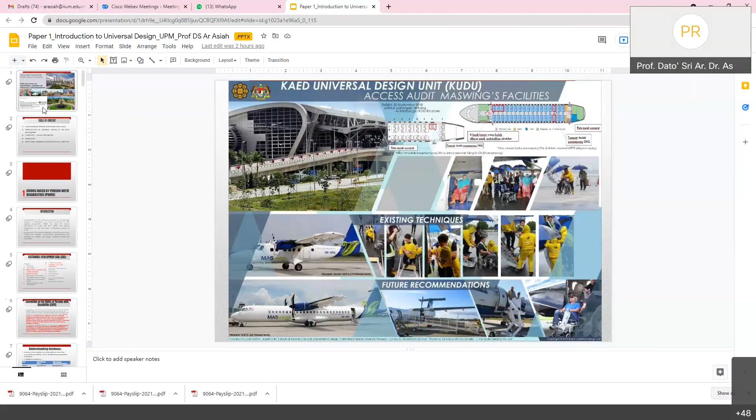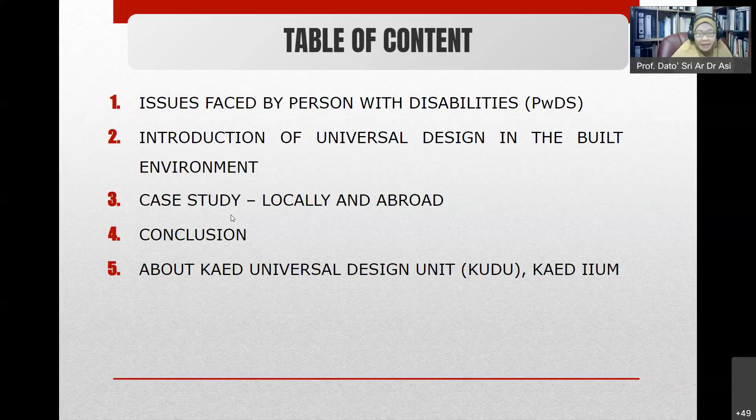This is the title of my presentation, covering five topics: issues faced by persons with disabilities, introduction to universal design, case studies locally and abroad, the conclusion of my presentation, and finally a little introduction to my unit, the Universal Design unit in my university.

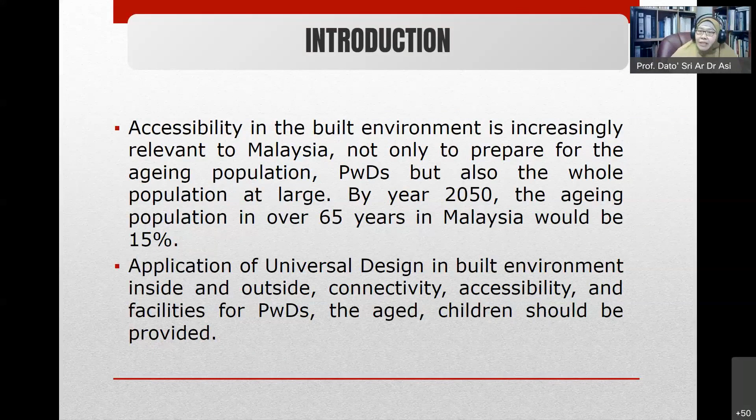By the year 2050, 15% of the Malaysian population will be above 65 years old. Therefore, this concept of universal design should be practiced now and improved further, inside and outside buildings, in terms of connectivity and accessibility, to cater for the needs of persons with disabilities, the aged, children, and others.

Therefore, we recognize the importance of accessibility to the physical, social, economic, and cultural environment, to health and education, and to information and communication, in enabling persons with disabilities to fully enjoy all human rights and fundamental freedoms. When we talk about economic, we must give them the opportunity to get jobs so they don't become poor. We must give them the opportunity to go to school - preschool, primary, secondary, even up to university level. Health, good health, and also the opportunity to get information, so that this group of people can have a better life.

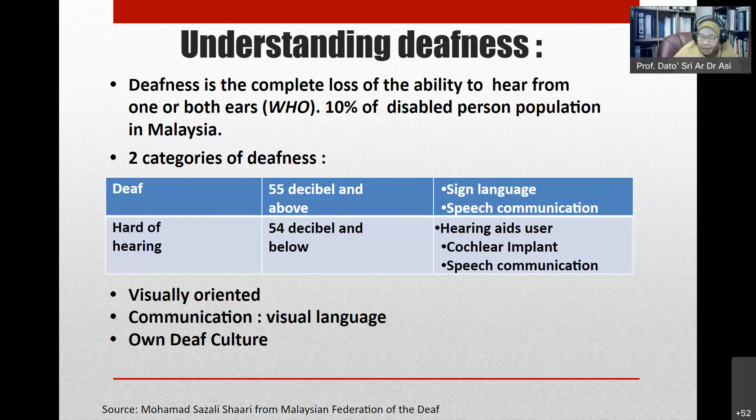It is important for us to understand, especially at building entrances and information counters, what are the expectations for this group of PWDs when entering a building. The best solution is having a glass door compared to a solid door, because they can use sign language to communicate with the reception if you're using a glass door. If it's a solid door, when a deaf person knocks and the reception answers 'please come in', he or she cannot hear. A two-way video intercom can also be used for this communication.

Induction loops are normally popular at transportation hubs. Information counters are normally busy and noisy. The solution at the reception or information counter, if that person is deaf, is to use pen and paper so this person can write down what he or she wants. For hard of hearing, you must have induction loops so he or she can have better hearing.

Another consideration is the lift. What happens if a deaf person is stuck in the lift? He or she can use the button to talk, or has to use a handphone, but sometimes there's no line in the lift. So for the deaf, in an emergency, there should be a special emergency button, a receiver for mobile phone, and for hard of hearing, a special emergency button, receiver for mobile phone, and induction loop system.

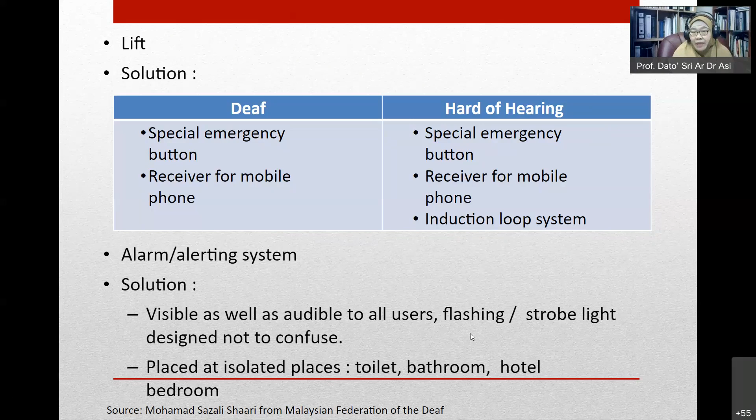Disaster warning or alerting system. There is a case where the majority of deaf persons working in a factory are all deaf. If there is no flashing light, and if there is any emergency like a fire, they cannot hear the bell ring. So what happens to this group of people? They will die if there is no support system to give them an indicator that an emergency is happening.

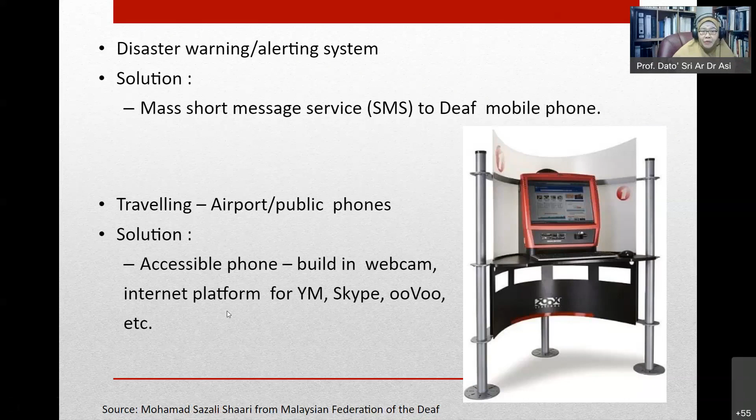So short messages, for example SMS to a deaf person's mobile phone, is another solution. Now it's quite common, even in the airport - if there is any flight delay, the deaf person will know his flight is delayed through his smartphone. Traveling, airport public phone solutions: accessible phone, built-in webcam, internet platforms like YM, Skype, and others.

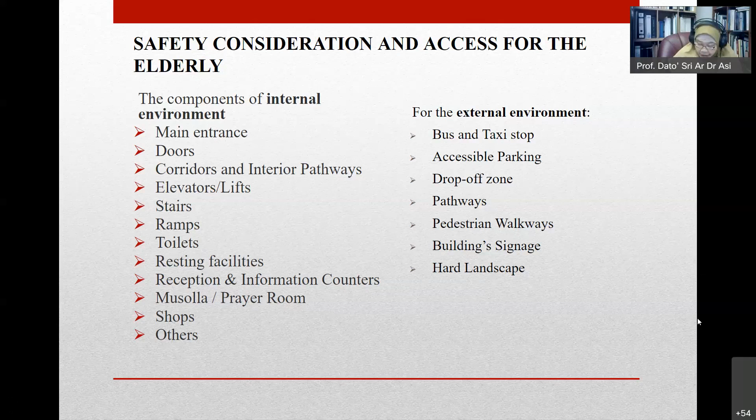These are the comments given by my friend, Godfrey. He was at the Malaysian Association for the Blind. He got his degree from UM. For your information, I told you earlier I was in this topic for the past 25 years. I think I look young, but I'm not young, I think.

He said engineers and contractors may be ignorant of the PWD standard in the code of practice, lack knowledge of principles of accessibility towards facilities for PWDs, cost cutting by developers and implementers, and lack of coordination between authorities, consultants, and developers. This is especially true at external spaces where you have your pedestrian walkway with so many things there - lighting posts, trees, and letterboxes. So there is no clear path for the pedestrian, and everybody is fighting for the space.

Broken tiles, warning and guiding tiles, uncut branches protruding into the pathway. The vision impaired normally use a white stick to walk - this is his eyes. So when he is using the white stick to walk, his foot is okay, but his forehead will be hitting the branches of the trees. Therefore, it is not suitable to position trees in the middle of the pathway.

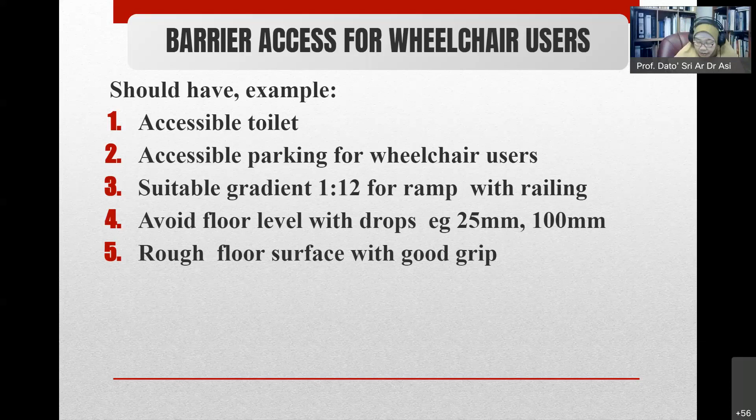Now we go straight to introduction to UD in the built environment. I am telling you about the Malaysian situation. If you are not from Malaysia, you can learn something about our country. We got independence in 1957. From 1957 until the 1980s, the majority of Malaysian architects and engineers were still studying, whether locally or abroad.

During that time, we don't have any standards for the disabled. This is very important because sometimes our friends, persons with disability, complain about why a building is not accessible - 'I cannot enter this building.' So I tell them what year those buildings were constructed.

If buildings are constructed in the 50s, 60s, 70s, 80s, they are not accessible, because we were so poor during that time. The country was busy developing in terms of education, agriculture, economy, infrastructure, and basic facilities. So we didn't concentrate on persons with disabilities yet, as we wanted to make sure the country was performing better. Thus buildings erected in this period are mostly not accessible for the disabled.

So this is the history of Malaysian Standards. Malaysian Standards were initiated in the 1980s and published in the 1990s. MS 1183, published in 1990, is the specification for fire precaution in the design and construction of buildings, revised in 2015. Then we have MS 1184, first published in 1991, Code of Practice on Access for Disabled Persons to Public Buildings. And MS 1331, 1993, Code of Practice for Access of Disabled Persons outside buildings.

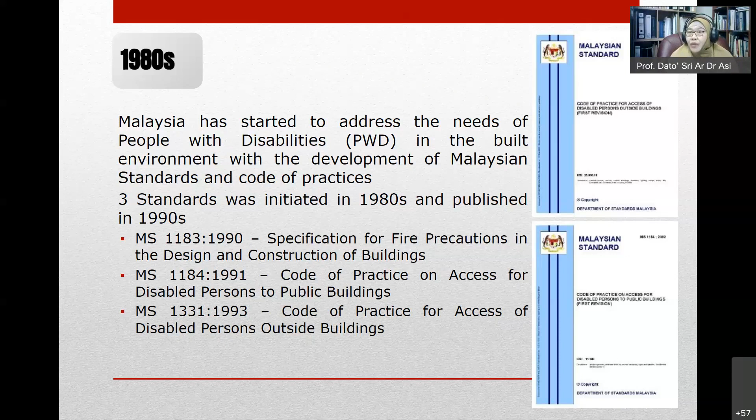When I checked the revision, I referred to documents from many parts of the world. We worked on that document for 2-3 years, and also referred to ISO 2011, which covers many countries. So if you look at the Malaysian Standard drawings, we have 2 sizes - one for ASEAN, the other for European. This is MS 1184, Universal Design and Accessibility in the Built Environment, Code of Practice.

For your information, Code of Practice MS 1184 is compulsory and mandatory, not voluntary. It is written in 34A of the UBBL. There are 2 documents specified there, MS 1183 and MS 1184. Both are mandatory and compulsory, meaning architects, designers, and engineers must follow this document and practice it, enforced both by local authorities and practicing professionals.

For your information, I checked 8 standards. Another document I checked is MS 2015, Part 1, 2006, for public toilets under minimum design criteria. There are more than 20 different designs. So when I was asked to do this, there was a history before - a Japanese tourist wrote a letter to our then Prime Minister.

Dr. Mahathir Mohamad, showing how beautiful Malaysia is, including the toilets. Because of that letter, they requested all the ministries to look into our toilets, and we prepared design criteria. I was asked to chair this document, and I referred to many references, one of them from New Zealand. I won't explain that topic today.

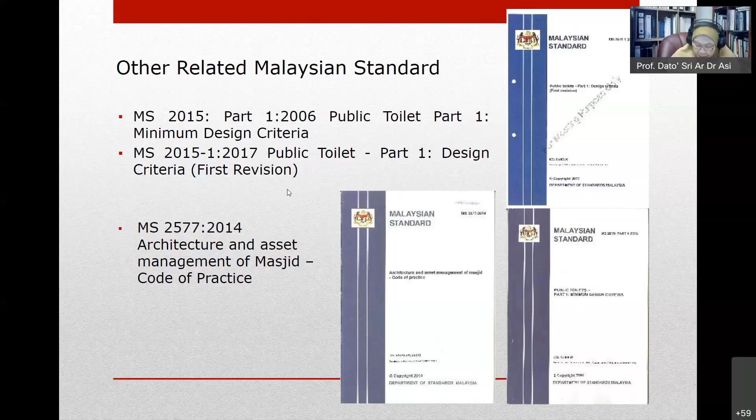We also have MS 2577, 2014, on architecture and asset management of masjids. I was asked by a practicing architect to do this document because they found not many documents or standards written on this, even globally. I checked architecture data and found that among all the data architects use abroad, only 1 or 2 pages were related to masjids. So I was asked to do this, and it was completed in 2014. I used many references for this as well.

So what is universal design? It means the design of products, environments, programs, and services to be usable by all people to the greatest extent possible, without the need for adaptation or specialized design - meaning from the womb to the tomb, people can use the space. Universal design enables a wider range of people to benefit from accessibility, safety, and usability without discriminating against anyone. The 7 principles of UD state that facilities should be designed to be usable to the greatest possible extent by all, so you have to use as much as you can from the space where you apply UD.

There are 7 principles. You can download this document from the internet.

Ron Mace is an architect, a well-known figure. Another definition regarding inclusive design is very important to consider: user-centered, user-centric, focusing on the users. When you want to design your building, you must know who your users are, both inside and outside, and also connectivity from one block to another, or the whole park.

I've assessed more than 700 buildings, including parks throughout the country, with more than 60 local authorities. I'm a consultant to 4 ministries, and I was with DBKL from 2000 until 2012, training them. Then with Putrajaya from 2011 until now, with MPPG from 2014, and many more. I train all over Malaysia, supported by Jabatan Standard and other ministries as well. So I'm quite busy, a bit less than Ustaz Kazim.

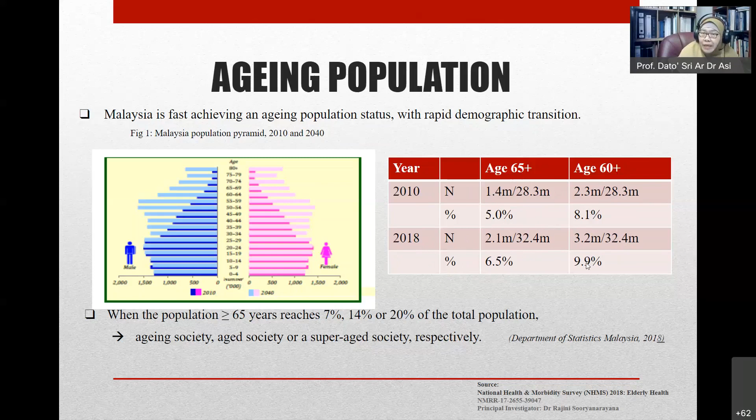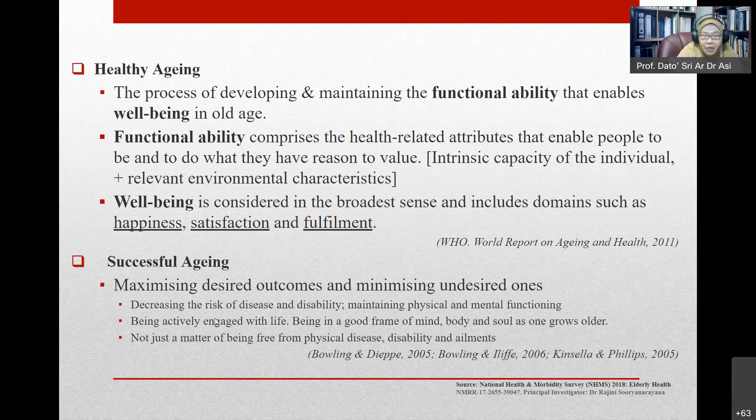Then we talk about resorts, we talk about transportation. Transportation covers air, jetty, water, rail and road. So all these 4 types of transportation must be accessible - accessible, connectivity, continuous - so that aged and disabled people can travel and use them, and also increase good economy for the country. Before PKP or MCO, Malaysia's number 2 income came from tourism. So I'll just go through this very quickly.

Here we talk about public transport and also social support. This is related to dementia. Dementia is a type of sickness that elderly will get, and there is no cure.

But if you refer to the Islamic perspective, if that person is a Muslim and reads the Quran every day, there is a possibility that you are not able to get dementia. That is from the Islamic perspective. I do not know about other races.

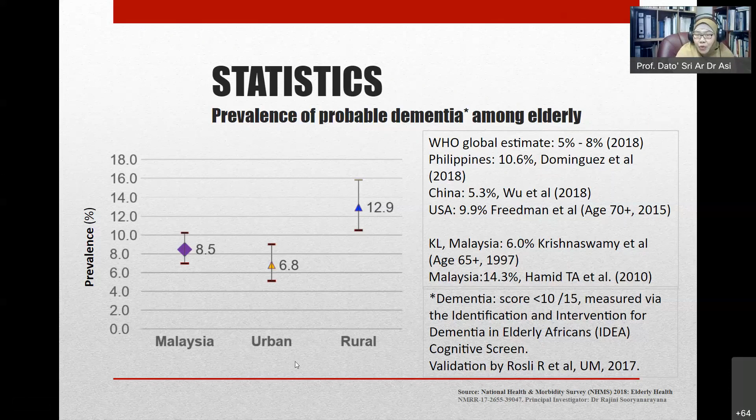So if you look at Malaysia's prevalence, it's 8.5%. Urban 6.8%, rural 12.9%. So the total percentage is higher for the rural area compared to urban in Malaysia.

This is more information regarding social support, quality of life, and living arrangement - living alone or living with family. You can see this percentage: very high is 3%, low to fair is 16%.

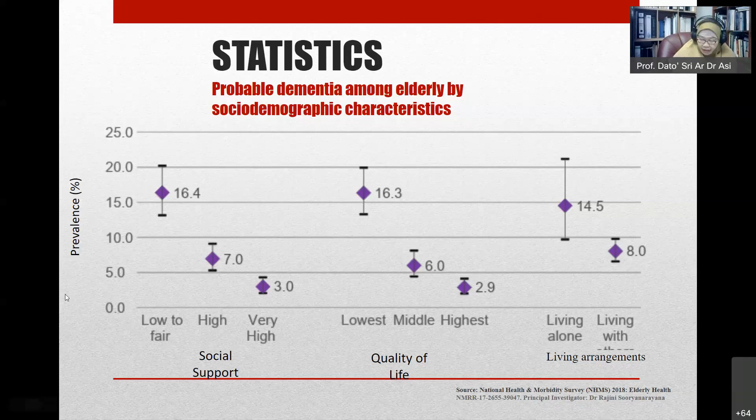It is quite frightening, Dr. Shurin. I'm now 63, I retired 3 years ago. I'm a contract professor in UIA. Let's say I will die at the age of 90, so I need another 27 years to work and sustain my life and health. Aging and health come together. If you provide good facilities for the aged, they can enjoy their life and good mobility, so they will have better well-being.

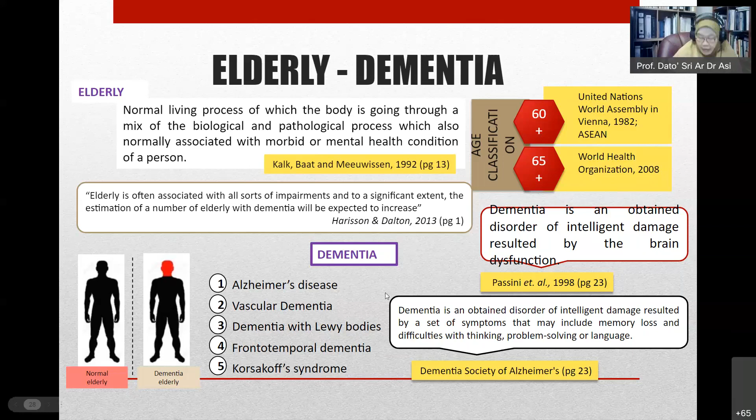Yeah, okay, this is dementia. I'm not going to go into detail.

For your information, as I mentioned, Malaysian standard MS1184 was written in the 1990s, same year as the Japanese standard. Our Malaysian standard and Japanese standard, same year, 1990s.

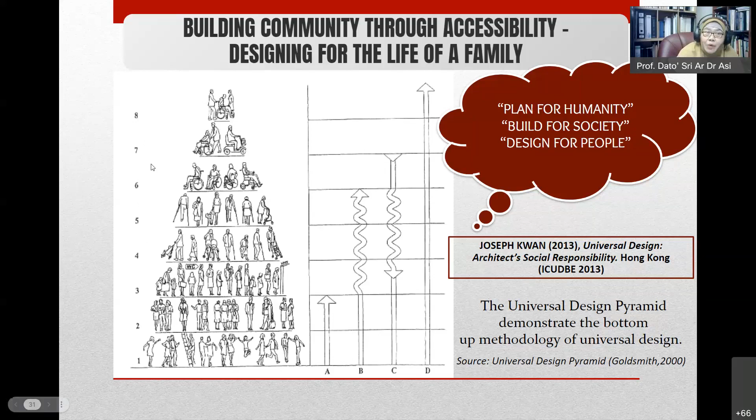One of my friends, by the name of Abdullah, told me, 'Prof, why don't we do it this way - if you focus on the disabled and the aging population this way, we cover everybody.' So I thought this was a good approach.

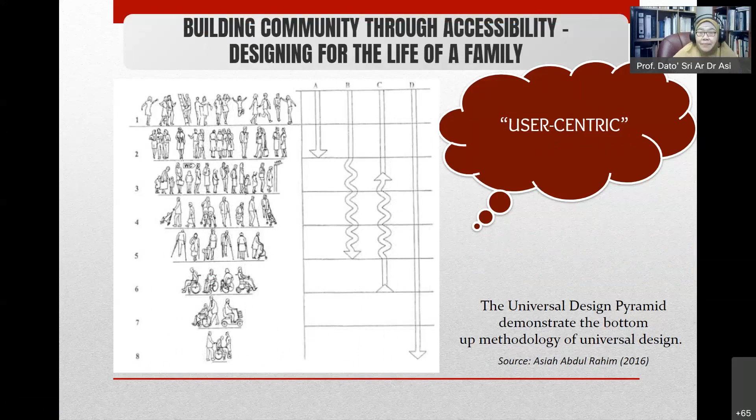So with this sort of disability - some you are born disabled, some you become disabled due to road accident or at work, and some due to sickness and aging. So you can have different causes.

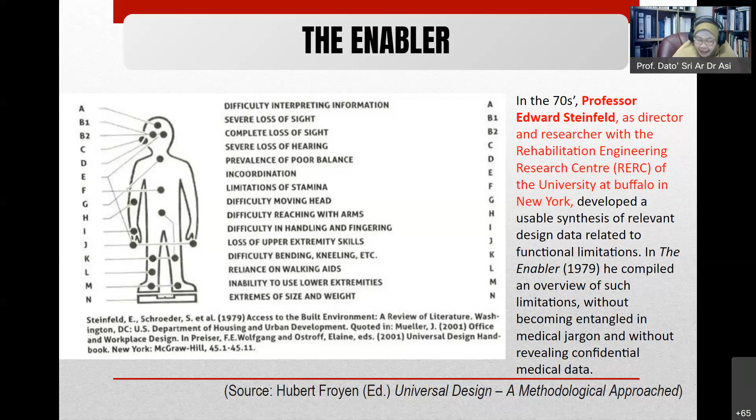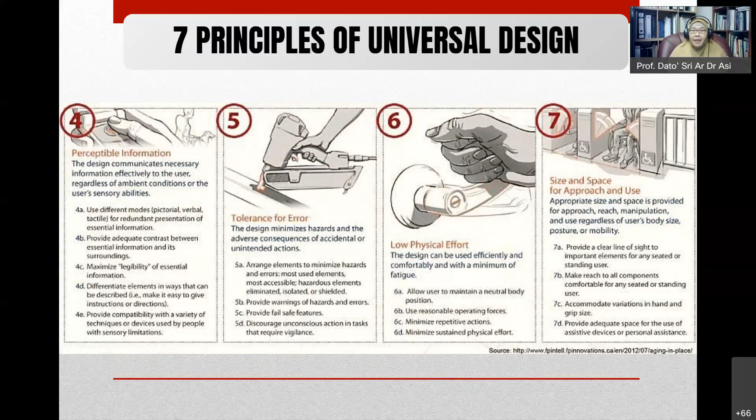So if your vertical circulation can allow all users to go up - for example, in one case, a particular wheelchair user only stopped at the 22nd floor, but his house was on the 23rd floor.

Why, Dr. Shereen, did he stop at the 22nd floor? Why? Can anybody answer me - why did he stop only at the 22nd floor, not the 23rd floor? Please answer me, don't be shy, we can do this very informally.

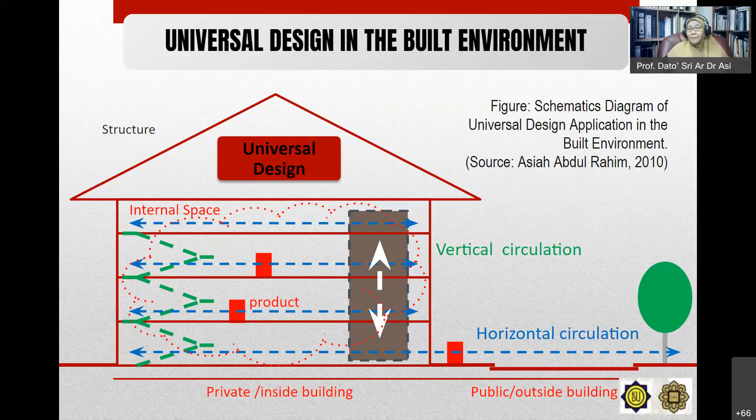Maybe the lift stops only at the 22nd floor because of the reachability - he can reach it. Oh, you cannot reach the highest button. So therefore, the architect must use a horizontal panel for the wheelchair user. Because the lift only has vertical buttons, he cannot reach number 23. Therefore he has to climb manually - he stopped at the 22nd floor, then from 22nd to 23rd he has to climb manually to go up to that level.

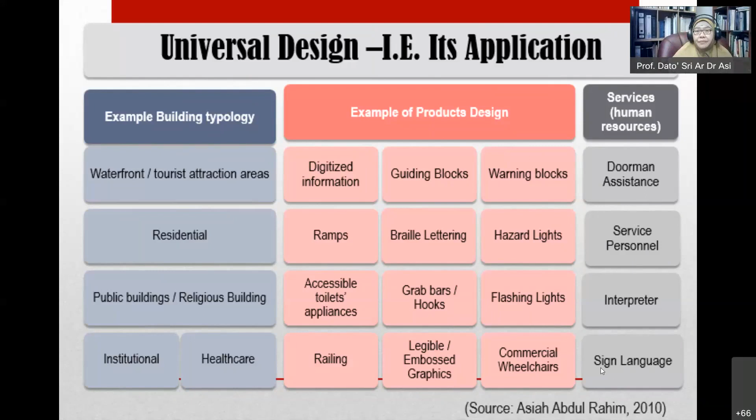I was involved with the Ministry of Transport to help prepare the SOP, the standard operating procedure, for their transportation. For your information, for flights, for the airport or the aeroplane, their SOP is good - we have no objection. If you go to KLIA 1 or KLIA 2, whether you take MAS or AirAsia, if you are an elderly person or a person with disability, they really take care of you. But you must inform them when you buy the ticket. So for me, I always travel using the OKU, the person with disability route. I travel all over the world using this route, not only to make my travel easier, but also I learned a lot from various parts of the world, the airports and others. I can share with you later on.

So this is, as an architect, where you want to position your universal design application in your building, where you receive your client brief, for example from a developer or something like that. For a new building, during the design process, you must put universal design consideration into your design.

I was a practicing architect for 25 years. I have my own firm and I have completed more than 340 million Malaysian ringgit worth of projects over the past 25 years with CCC and CF. In all the buildings I design, I include universal design. My firm started in 1995, covering high-rise buildings, factories, office buildings, clinics, and schools. I managed to include these facilities in my buildings because I follow the data from the Malaysian Standard, and the Malaysian Standard is compulsory, mandatory - it is equivalent to UBBL.

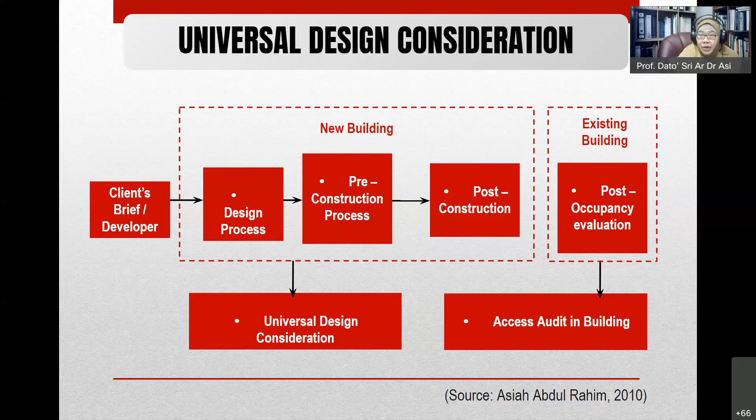This is detail from what I mentioned. I'm not going to explain it again, it is almost similar to what I mentioned earlier. There are two persons who do submission. The first one, the principal submitting person, which is AR, the architect, and IR, the engineer. Architect will handle buildings, IR engineer will handle factories and others.

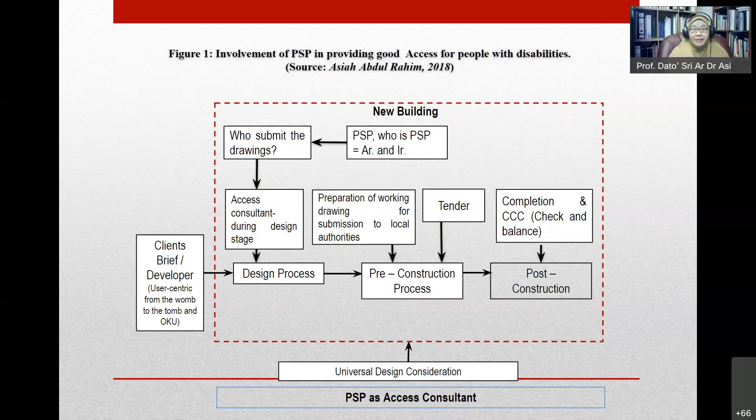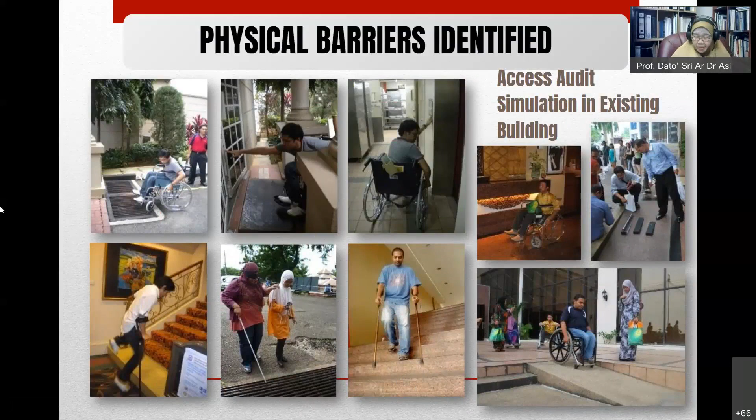I bought this house. I used to stay in Subang Jaya. I bought a house in Putrajaya because my husband was a wheelchair user. He was a civil engineer, but due to sickness, he was diabetic, so he had to cut below his knees. He retired at the age of 40. So I was the only breadwinner of the house with two young children and so on.

So I chose Putrajaya. I bought my house there because of accessibility. It took me 2 years around Kuala Lumpur to find the best option for me. When I am in UIA, my husband can stay in Putrajaya. He can go to the Clubhouse, wheeling from my home, only 10 minutes. He can go to Pasar Medan, the market, because the market is only 2 floors, but there is a ramp.

So the haircut is done on the first floor. And then you can go to eat at Medan Sejarah, a double story building, but there is a lift to go to the first floor.

This is very important, and he can also go to the lake because my house is very close. Sometimes I order my food at the Lake Club. I travel from UIA and say I want to see you and my children at 8 o'clock, I ask them to cook, and everything is ready on the table by the time we have dinner. He moves from home by car or wheeling, only 10 minutes, so when I arrive everything is ready. My life is easy, and my house is very friendly as well. I did modifications and so on.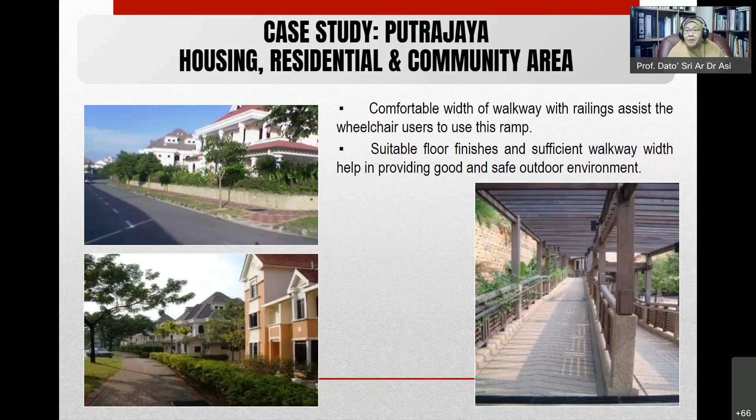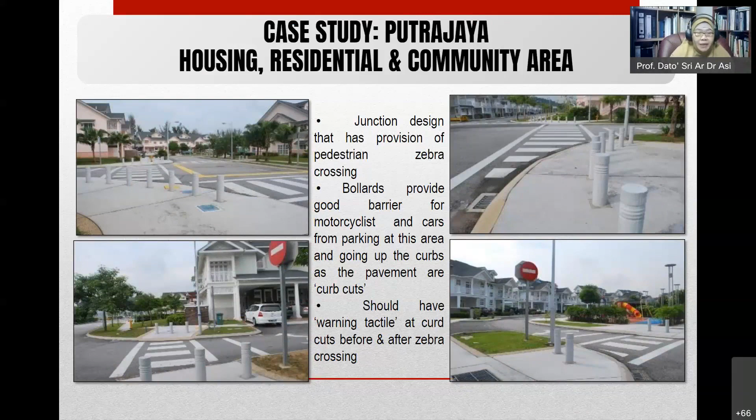This is another good example, Precinct 18. If you look at the curb, the height is only 75 mm, equivalent to 3 inches. Most curbs in Sweden or Scandinavian countries are about this height. Then your ramp is more pleasant compared to 150mm or higher, which is much steeper and you have to work hard to wheel. So this is one example which is very pleasant.

In Malaysia, there is a bus stop to cater for wheelchair users. This is a very nice approach to the house - the gradient is very comfortable, with a good walkway, clear pathway, no trees, no telephone poles, no letterbox, no lamppost, very clear like this. Although the size is only 1.5 meters, at least a wheelchair can go there. This is the quality that we expect.

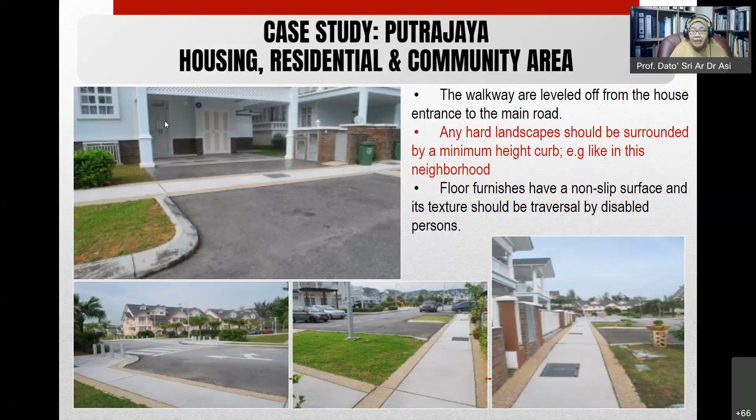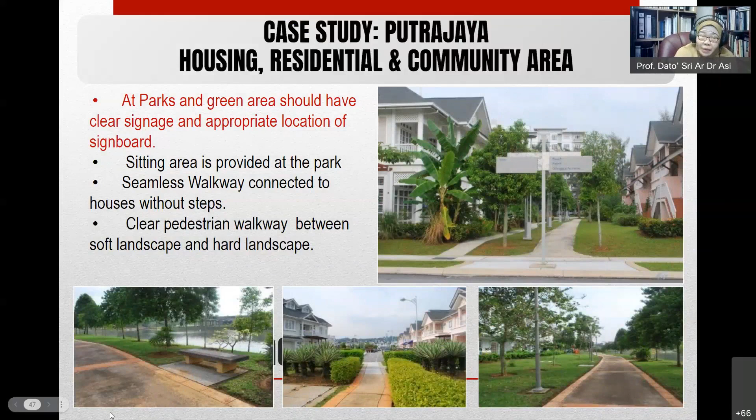More examples, look here below - this is near my house. There's a sitting area here with concrete before the walkway, so there's no grass here. If somebody wants to sit there and socialize, they can push their wheelchair near the seat. More examples - so I became a wheelchair user after my knee operation.

I was given the role of leader for a research project which required me to travel to many parts of the world. I traveled to Dubai, then Spain - Granada, Alhambra - and many other places. I went to London, then Scandinavian countries and so on, with many purposes and many types of building typology. So I used all kinds of routes.

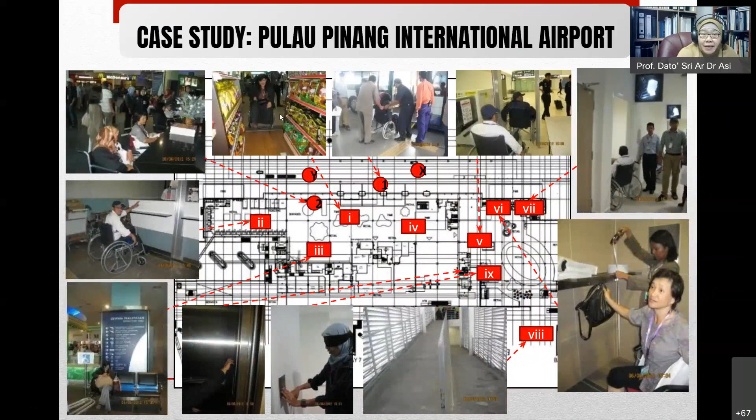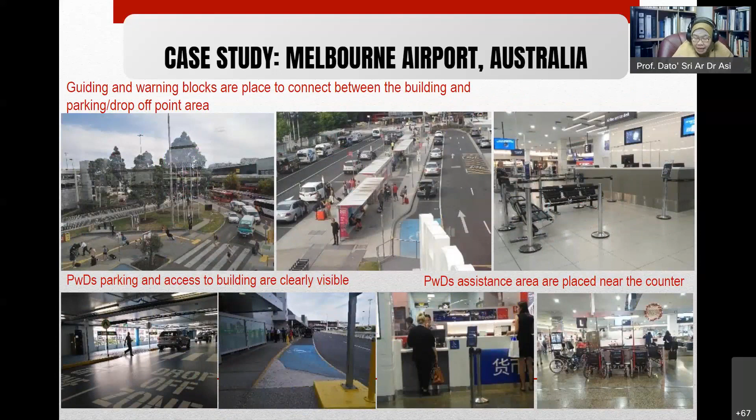And then there's the mapping of the city - I think this is another area we can develop further. I was in Melbourne - look how accessible it is, with continuity, connectivity, a seamless journey. You can see same level access, easy movement, and good signage. More examples in Melbourne - this is good, with big signage for, I forgot the term, those who are not able to read or differentiate between letters like P and B, B and D, P and Q.

So you have to use a big symbol, so you can see the symbol from far away. And also braille pattern there. This is very important.

But in Japan, one thing is good - their people, especially the vision impaired, are able to buy tickets at the counter because there is braille. I think in Malaysia it's quite tough, though they have been trained. I think Japan is quite advanced in the world at ticketing. Now these are some more examples of signages.

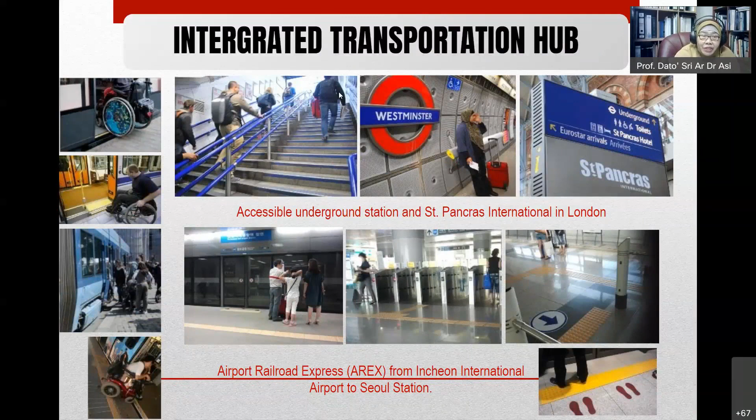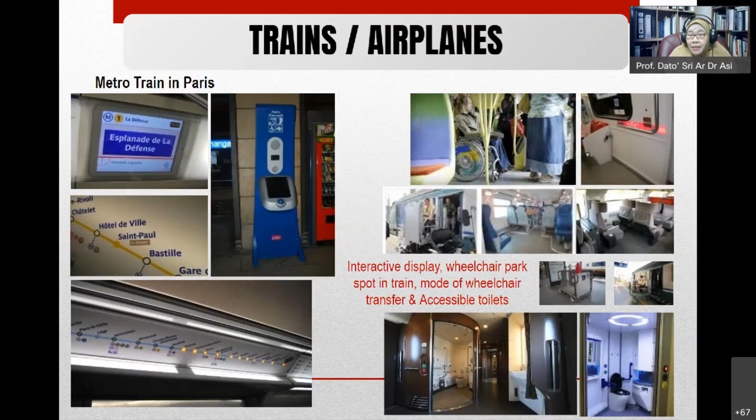In London, you have railing for children as well. And this one, for a train and aeroplane. Some facilities for transportation - this is very important for transportation, vans and so on.

Look at the details here. In Malaysia, we have these as well, and some free buses. MPPJ and Kuala Lumpur also provide free buses, but we must consider connectivity from one place to another.

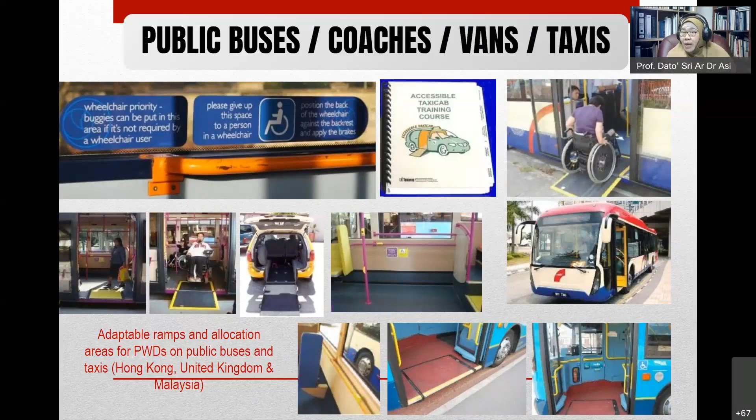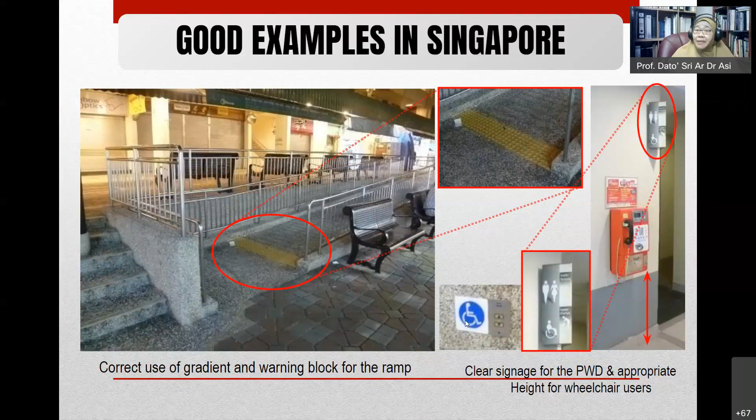This is another example - you have steps, and at the same time staircases and ramps with warning blocks. You can see the railing on both sides. You have seating for the elderly. You have small signages there, although the size is only 100 by 100, 4 inches by 4 inches. This is from my traveling to Europe and the United Kingdom.

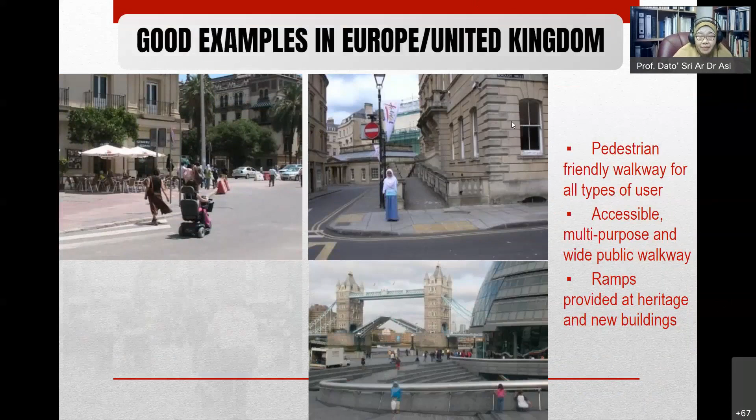This is a heritage building with a ramp. So you have steps and you have a ramp. But this is a little bit dangerous, especially for a pram or wheelchair with smaller wheels - you have to be very careful here.

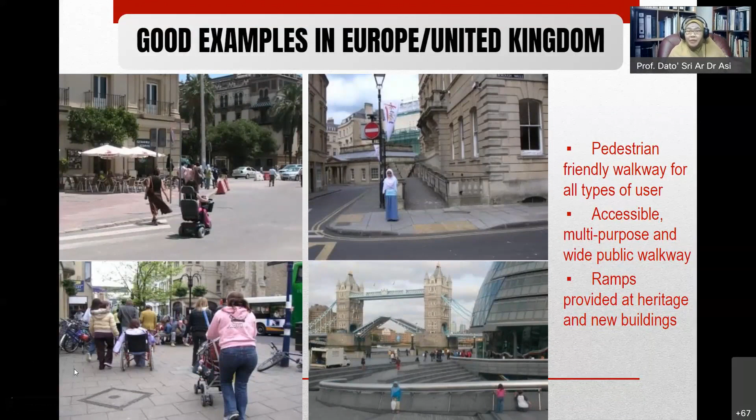The bottom left one is in Oxford - you can see all sorts of people using the space. If the spaces are accessible, everybody can use them, do shopping, and it's good income for the business.

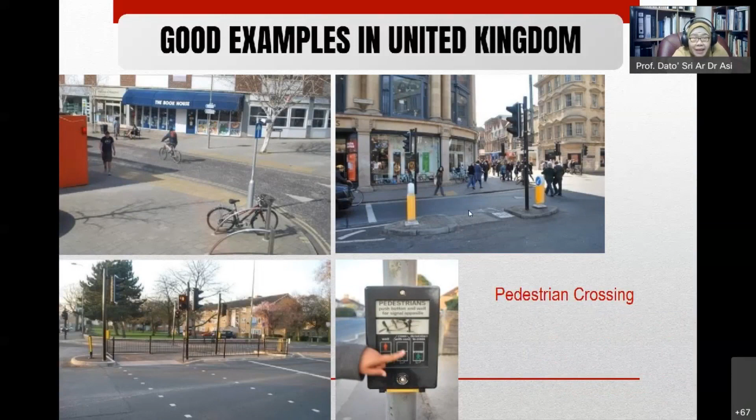Look at this one - to cross over, you just cut through. So simple, it's not very difficult. And I was wondering why people didn't do it.

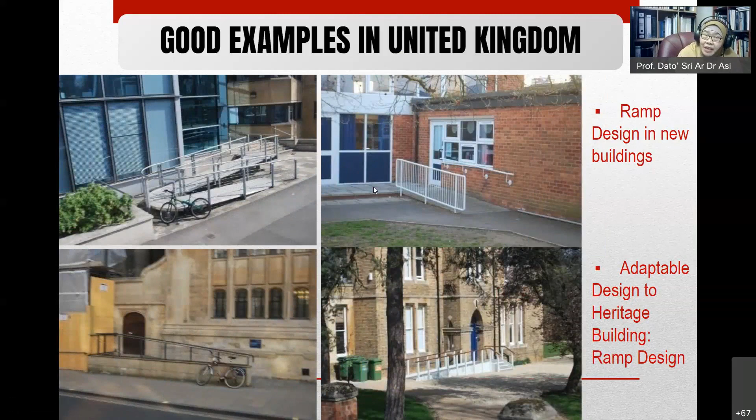This is an example of a ramp, to cater for a 1 to 12 gradient, so they have to go longer like this to cater for 5 steps. This one step is 150, that's 150 times 12, times 12. Then you have this distance. This is at a Heritage Building.

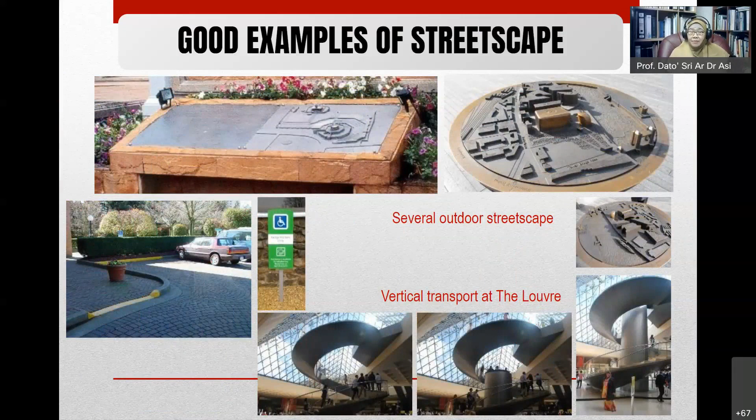More symbols for people, especially those with learning disabilities. In Paris, this one is very important.

Platform lift - you are not able to do the ramp because the side is small, so you use this platform lift. You just press the button, and this thing goes up. If you are not using it, it becomes like this.

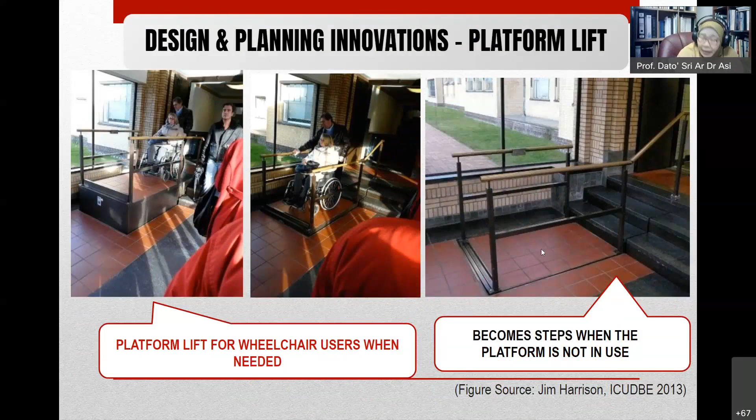This is from my friend Jim Harrison - we were together in many places. His mother has dementia, so at night she likes to go here and there. So what he did was buy a product there that can talk.

Go back to bed, mother. When she crosses, this product will talk.

Go back. This is his sketches. Yeah, so I finished some examples.

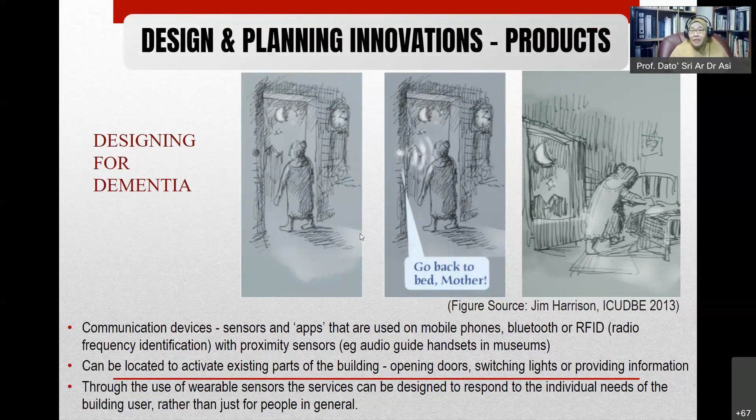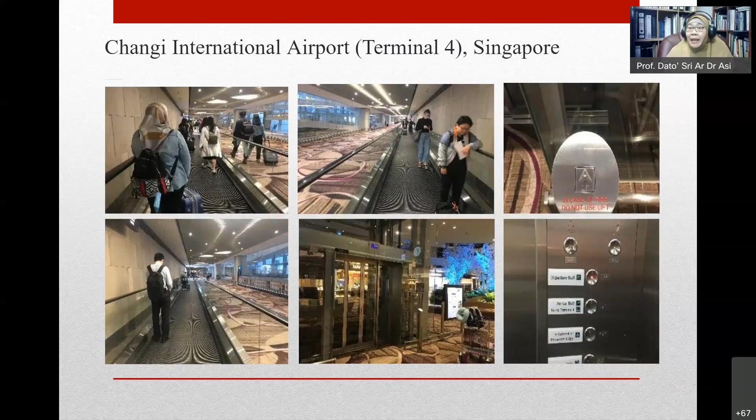Now I bring you to Singapore, when I brought my students because I was the course coordinator for high-rise building. So this is one of the newest airports in Changi, Terminal 4. Some other facilities you can also see similar in KLIA too, but you can see the signage as well as wayfinding - very beautiful. From far away you can see the signage for toilet male and female, as well as changing nappy and wheelchair, and the toilet. You were wondering why this toilet...

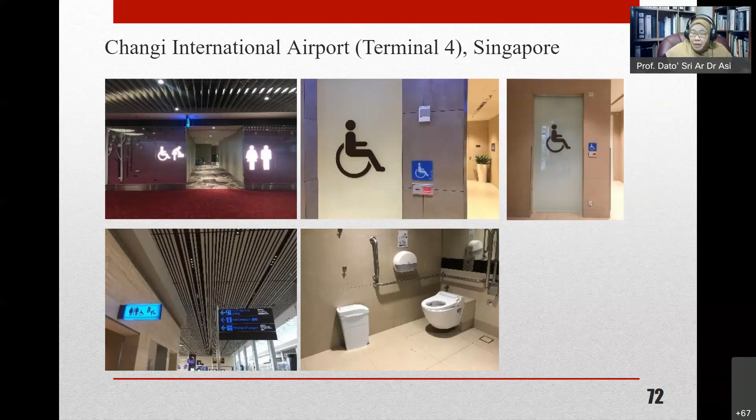Below, having the steel grab bar at the back. The majority of accessible toilets in Singapore have a similar design - they have it at the back. I don't know, maybe some elderly or disabled person uses a different style in the WC to hold, to avoid falling. Falling is another topic, very interesting.

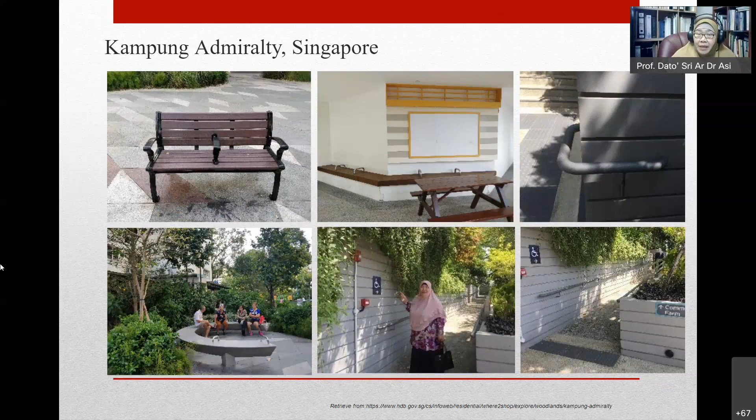So this is in Admiralty - they have good signages. This, they call it a refuge area. This wall is 2 hours fire rated, so if there is any fire, wheelchair users will stay here to be helped. The wall is 2 hours fire rated. Even in high-rise buildings, sometimes they have a special floor.

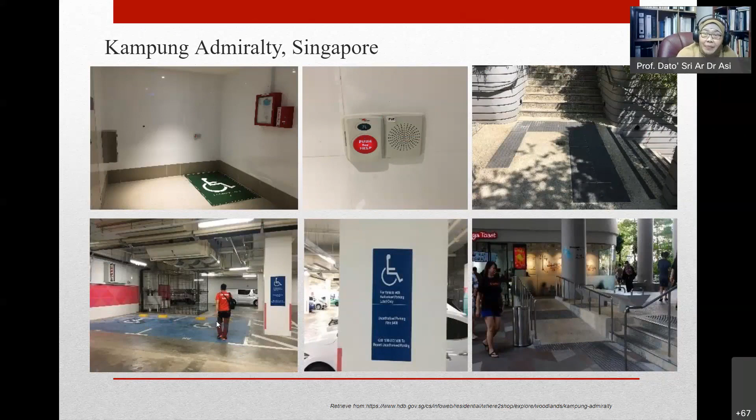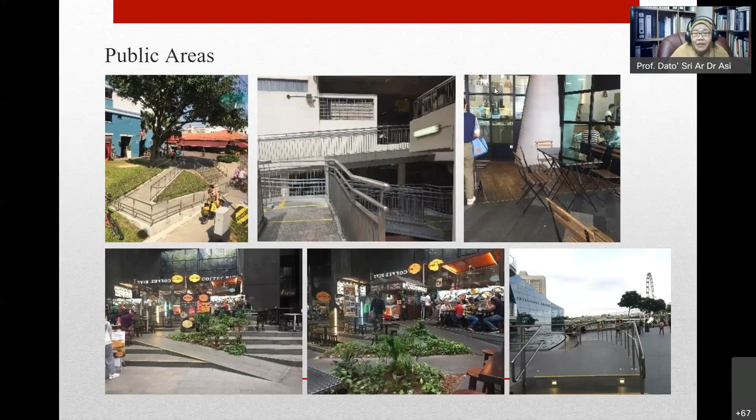So more examples here, I'll go very fast. Look at this ramp - there are many different types of ramps. The most important thing is your railing. You must have railing on both sides. For example, in Masjid Al-Falah, this is very important.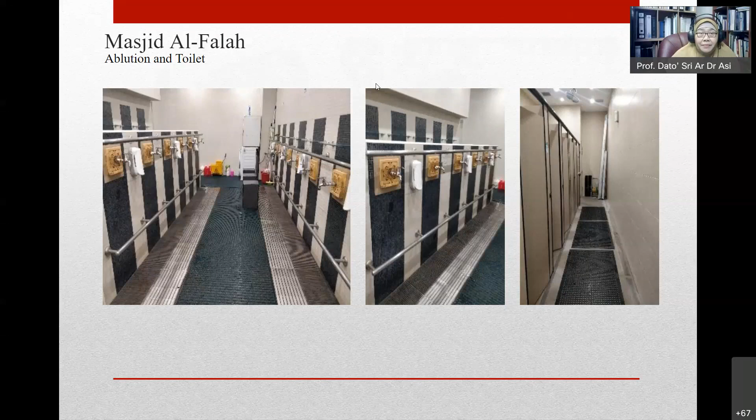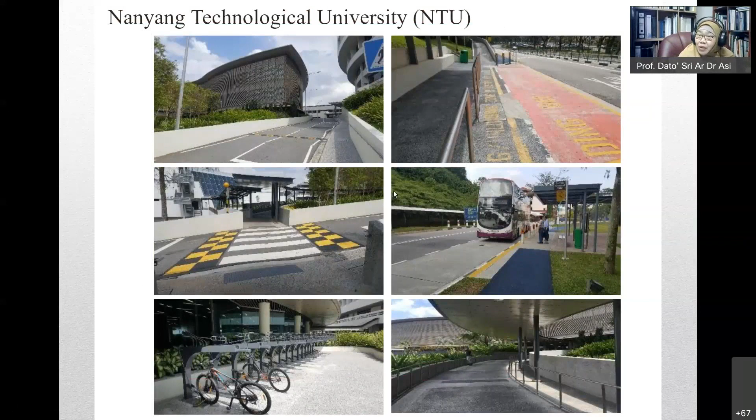This is at Nanyang Technological University. Dr. Shurin, whenever I go, my objective is doing other things, but my phone will capture other things - that's why I never forget about this topic. What I wanted to show you is the seamless journey and the type of corridors and pedestrian walkways. Very clear, and many railings. Very clear pathway, and good signages and symbols - very clear, you can see it's very nice. And also the refuge area there. This building, I think, got after gold - we call it platinum. They don't use plaster for the concrete.

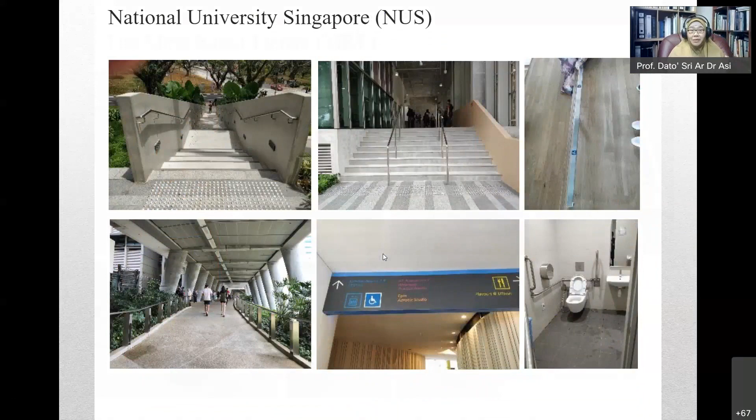For example, I'll go very quickly. My conclusion - I hope before that, my conclusion - already 7. UD program, UD awareness should be given to all staff at the universities, especially the development division where you do the construction. So you can do both assessment audit, and for new buildings you can apply straight, but for existing ones you have to do an assessment audit.

The subject of universal design accessibility should be taught as an elective, which you are doing now, which is very good. Even at UIA, I have a subject for this elective - 14 weeks. This topic is 14 weeks, only on universal design, Prof. Yeah, only on universal design is 14 weeks, so I'm teaching this subject. At the end of the day, they become experts on this topic because 1 hour is not enough. And there are many, yes I know, but at least an awareness program - that's right. Promoting the Malaysian standard, you can look at other interrelated items, and finally you can buy this other item - item 4. You can buy it online, yeah.

Now I would like to share with you my unit. I was with UIA in 1998, but as I told you, I was with the ministry for 25 years under 5 ministers. So I served for many years. I didn't convert to a center because I'm worried about KPI. My KPI is like a center, not like a unit - my KPI is like a center, but I do not want to change it to a center.

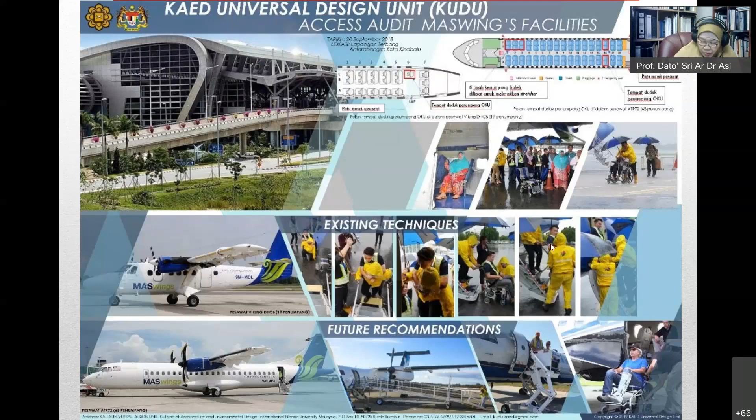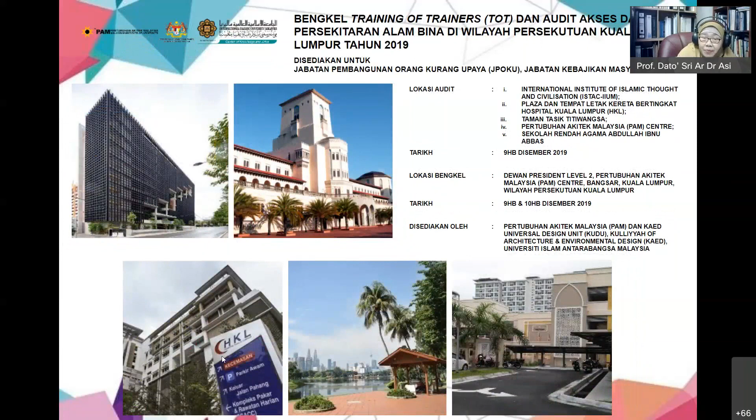So this was one of my projects under the Ministry of Transport, I was with the TKSU. These are some other examples - I was asked by the Vice Chancellor to audit University Technology Petronas, in 5 buildings. I was also asked to audit ISTAC, PAM, Hospital Kuala Lumpur, schools, and others.

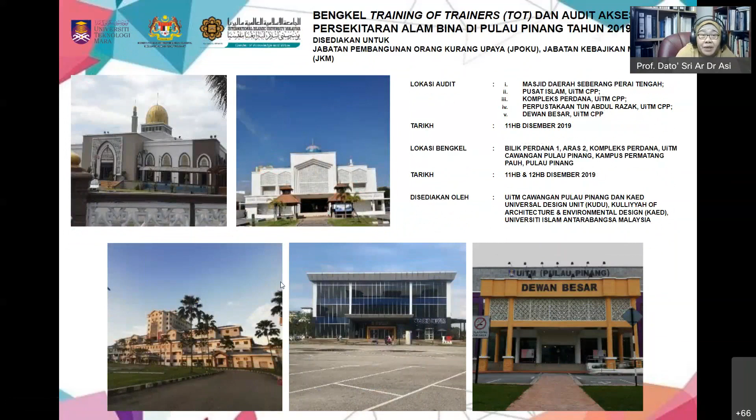I also audited a masjid in Pulau Pinang, this one under UiTM. They asked me to audit it. This one quite recent, last week - I was asked to do an access audit for PDK.

So these are some of my tasks that they wanted me to do. I want to go to Terengganu, Perak, Johor, Melaka and Putrajaya - 5 more before the end of this year. So I bring a little to Ustaz Kazim, as I mentioned.

Okay, so this is what happened when I audited various buildings and so on. That's all, thank you so much. Sorry, I took a few minutes longer than expected - I'm supposed to stop at 7 o'clock.

Like you said, it needs 14 weeks to really digest and become an expert, because I didn't teach you the Malaysian standard. Malaysian standard is quite thick. Each topic has its own calculation and so on - there's another topic, but that needs another hour on the standard.